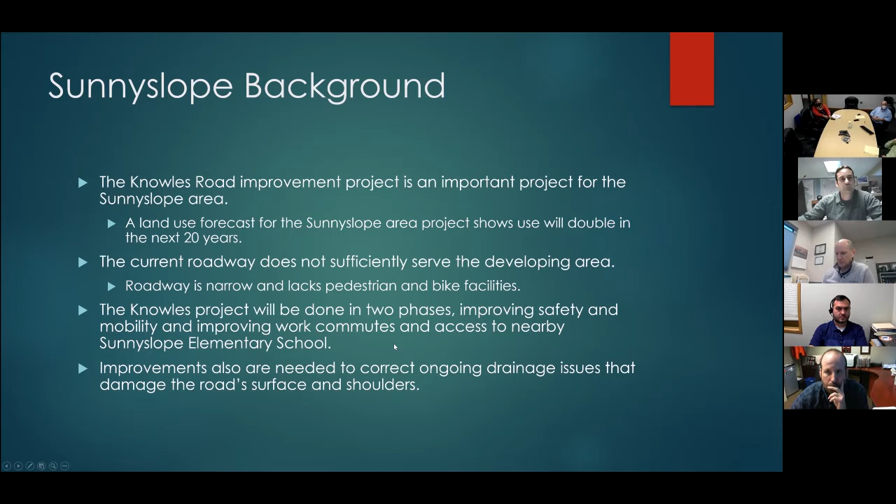So just a brief overview from the construction standpoint. It was awarded almost $1.4 million in grant funding from the Transportation Improvement Board Urban Arterial Program, and it's also supplemented with some local county funds and stormwater funds.

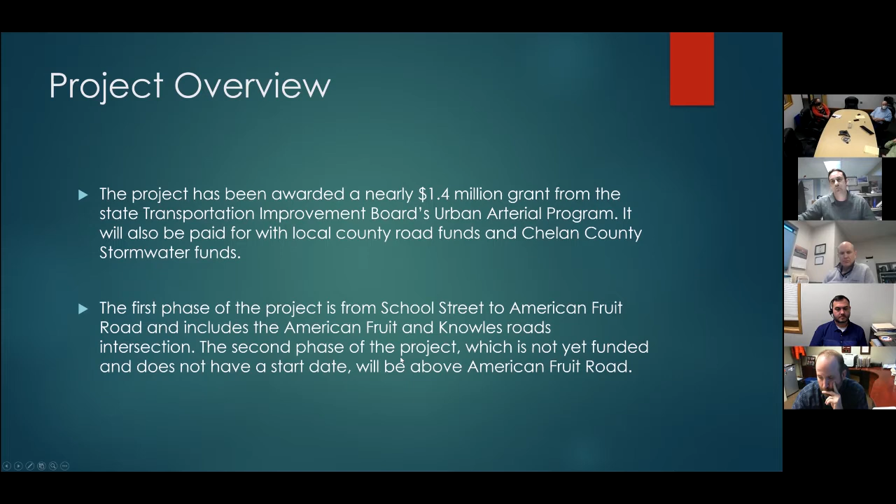The first phase will be from School Street, working up north on Knowles Road to American Fruit, and it includes some intersection improvements. The second phase, which is not funded currently, would take off from that ending point at American Fruit and go further north.

There's kind of an aerial overview of the existing facility right now. The dashed blue line are existing sidewalks, and Knowles Road runs north-south.

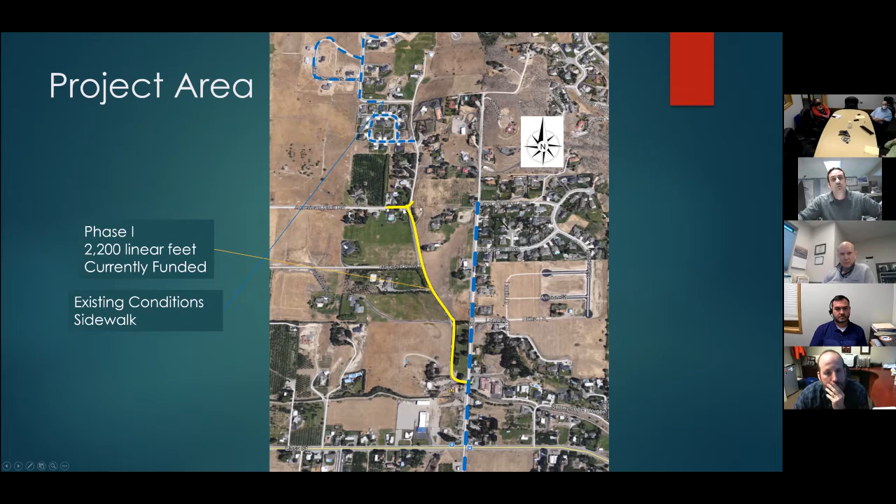So on this phase 1 project, there's about 2,200 feet, from School Street to American Fruit. The next phase will continue up and tie into that hairpin turn up by Sunnyslope Meadows, just past Lily Lane.

For the sidewalk facilities, shown in light blue, it would be constructed on the west side of the road. Once this project's done, in conjunction with the second one, we'll have connectivity all the way down to Sunnyslope School.

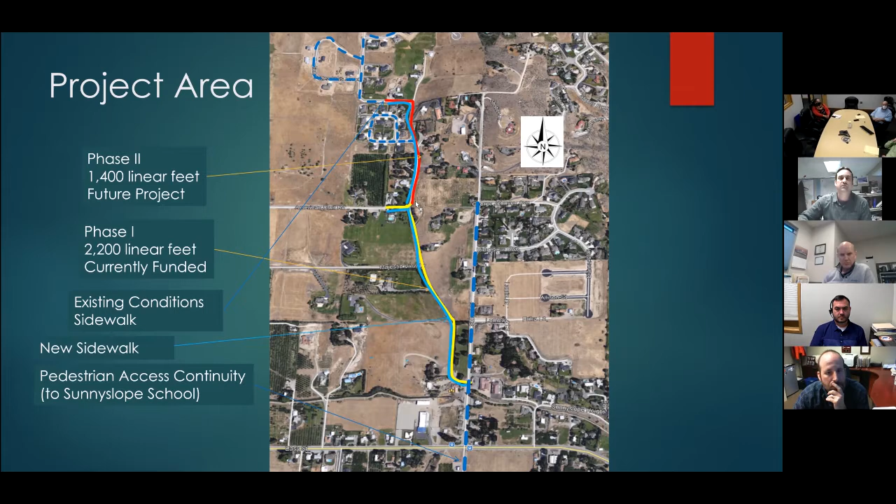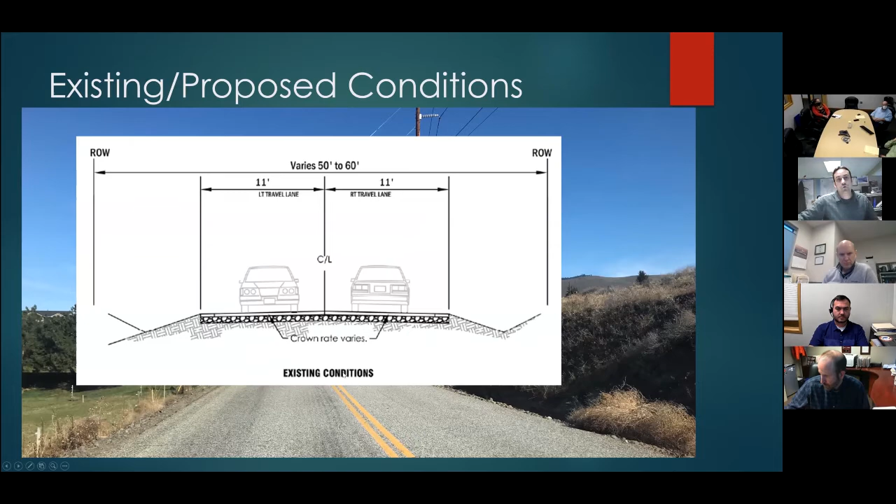Some key design components, starting with the pedestrian and road widening. Most of you are familiar with the roadway's existing conditions. There's definitely some design challenges here with the topography, utilities, and it's a narrow roadway. We've got basically 2 11-foot lanes.

The proposal will be 11-foot lanes, 5-foot shoulders, and those shoulders will be multi-use for safety and for bike access. The sidewalk would be constructed on the west side. Some portions require gabions, and we'll add the infrastructure for all the stormwater to catch the runoff on the road.

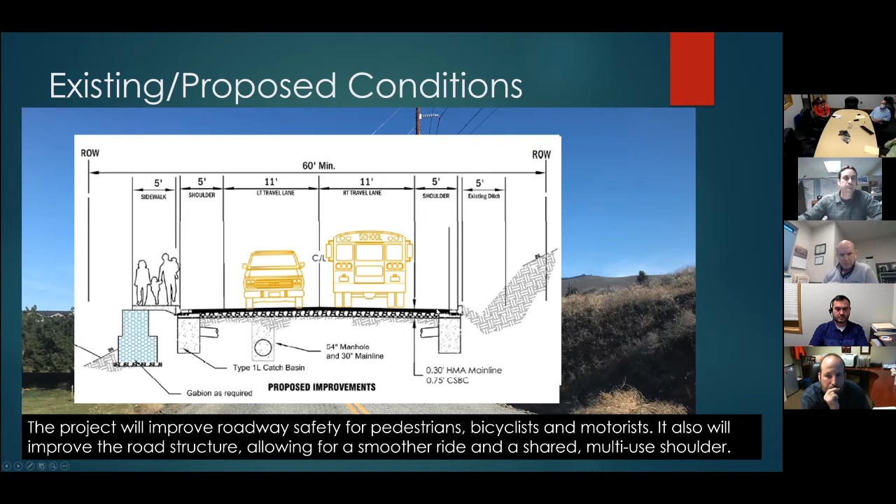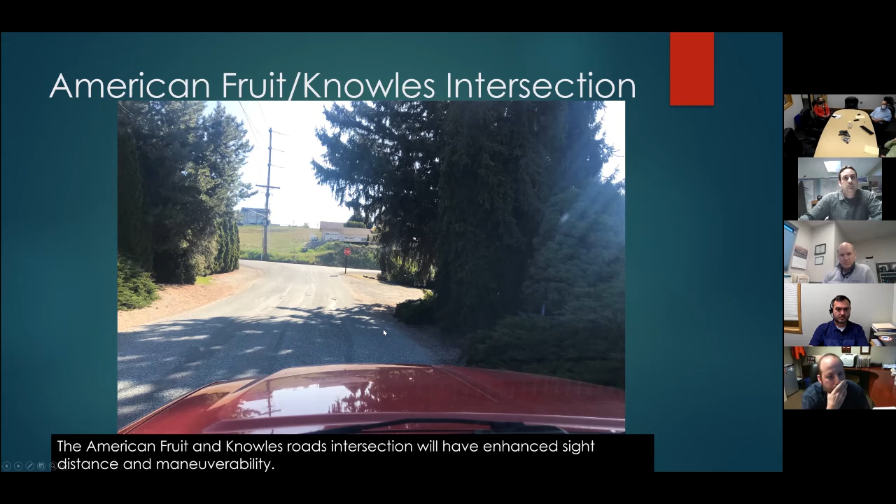Also included will be the intersection improvements. This is American Fruit Road looking eastbound, you can see the existing grade profile here. This is stopped at the stop sign looking north and southbound. You can see some of the intersection sight distance deficiencies here.

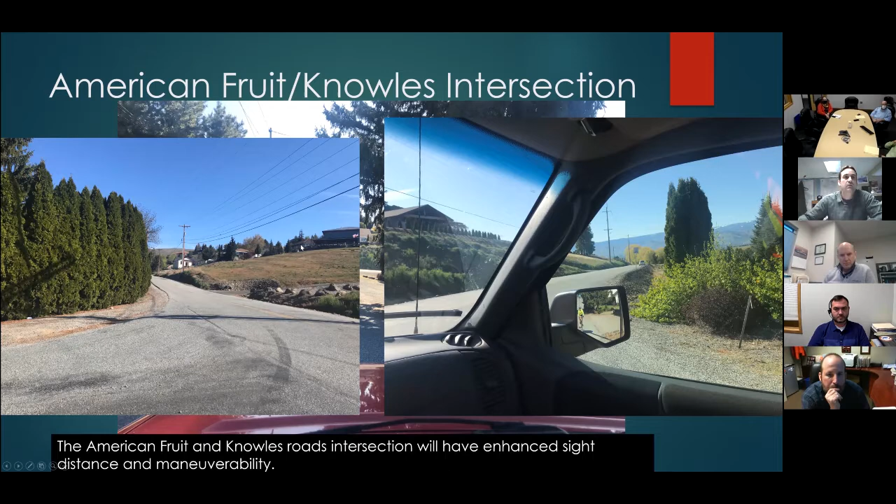This is kind of an overview. The top picture here is a plan view showing the existing road, and the darker gray shows where we're widening. This darker gray here shows where the sidewalk would be, and below that is the profile of the roadway.

American Fruit would probably be raised almost 3 feet, and that would bring that intersection elevation higher for better sight distance. The widening of the radius would improve mobility for larger vehicles.

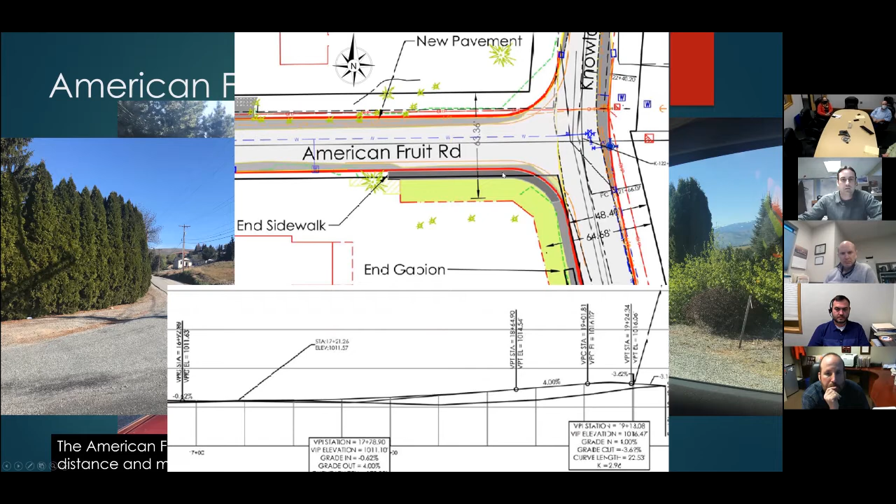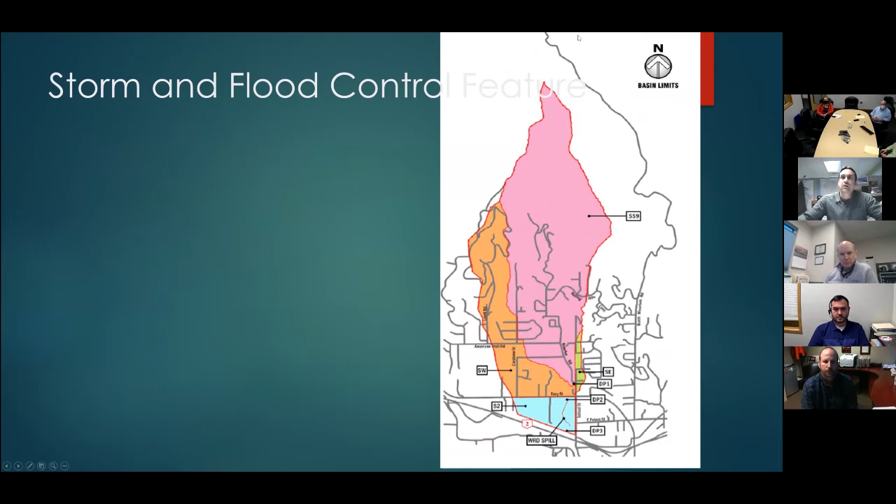I mentioned the stormwater conveyance. This is an overview of the existing basin, that's almost 800 acres. This is zoomed in more project specific, but this dark blue line delineates the natural drainageway.

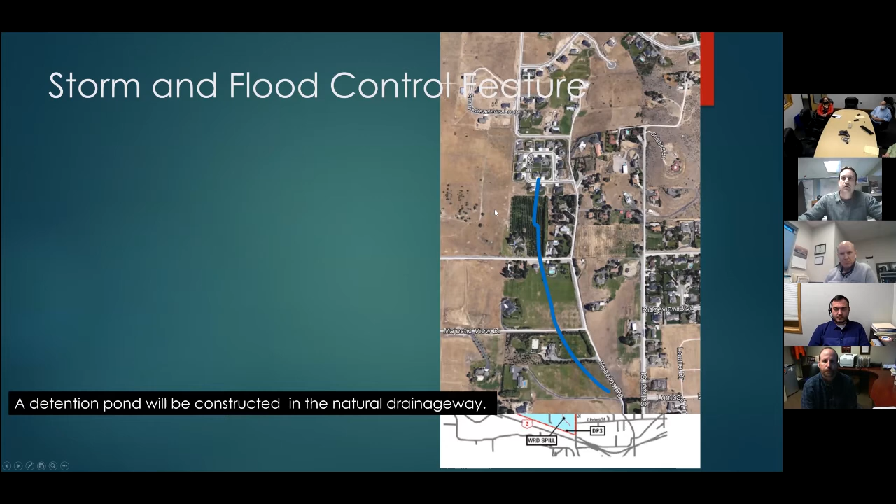With the project at the south side, we're looking at constructing a detention pond. This pond would treat all the road runoff, and it also fits the topography for the area. The pond was sized to address not only the roadway design, but also a global view of that flood zone area, and it's all sized accordingly.

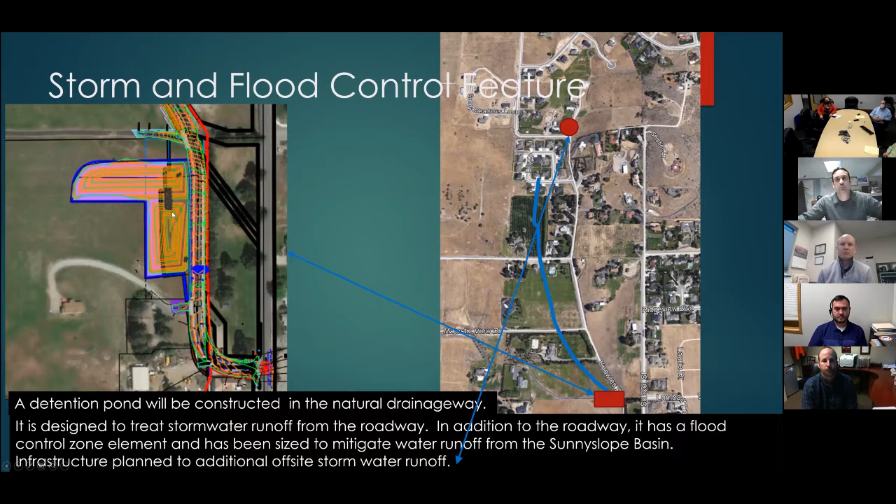Just rough dimensions of the pond, it's about 12 feet deep, and it's sized for, like I said, the 800-acre basin.

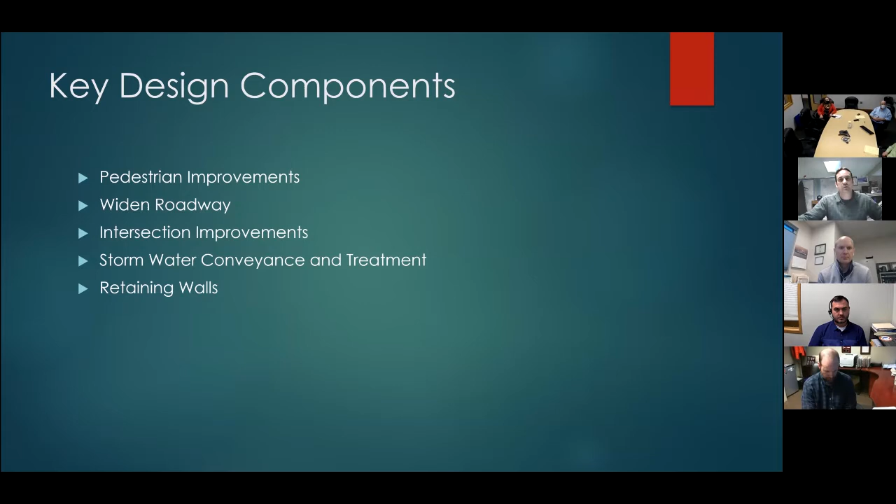And we'd have our sidewalk facility constructed on top of that with pedestrian railing.

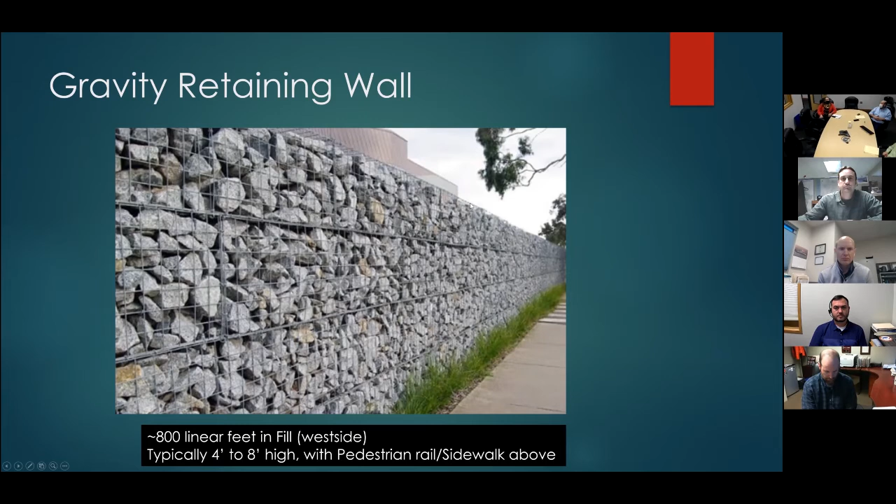So where we're at with the project now is we're about 75% through the design, to understand what the area is we're working in and what the corridor for the roadway is going to look like. We're looking to go out to advertisement for bid this winter, with construction that would follow in the spring or summer of 2022.

With the construction, it should take about 10 weeks from start to finish. Before we get to that point, you guys might see some utilities being relocated and some preliminary work being done. I think there's 2 or 3 transmission poles that need to be relocated.

During construction, it'll be mostly a 1-lane road with flaggers, our typical traffic control scenario. We're also considering a detour for some of the larger impacts, like trench work when we start digging the road up. Some benefits of a detour would be speeding up the work, which results in minimized impact to the traveling public.

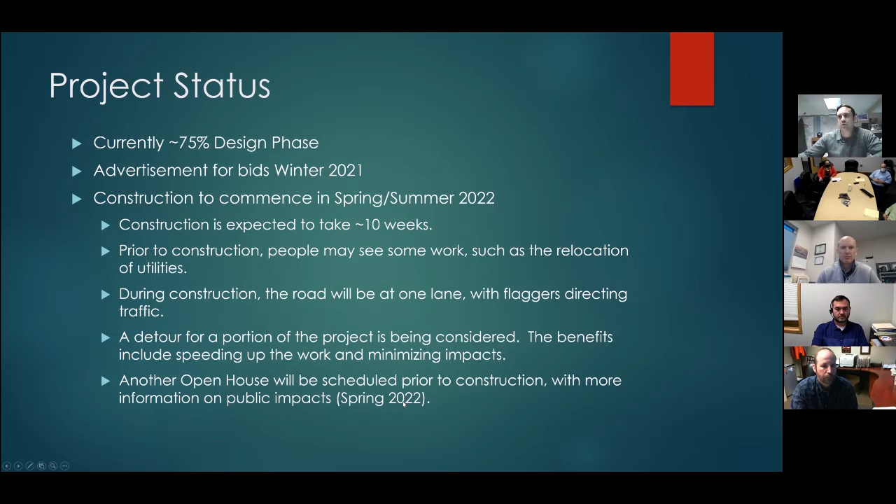As we get further into the design and identify those impacts, we can have another open house and discuss those in more detail. We tentatively have something scheduled for the spring of 2022, and at that time we should know the contractor's schedule and can address those impacts more specifically to the project.

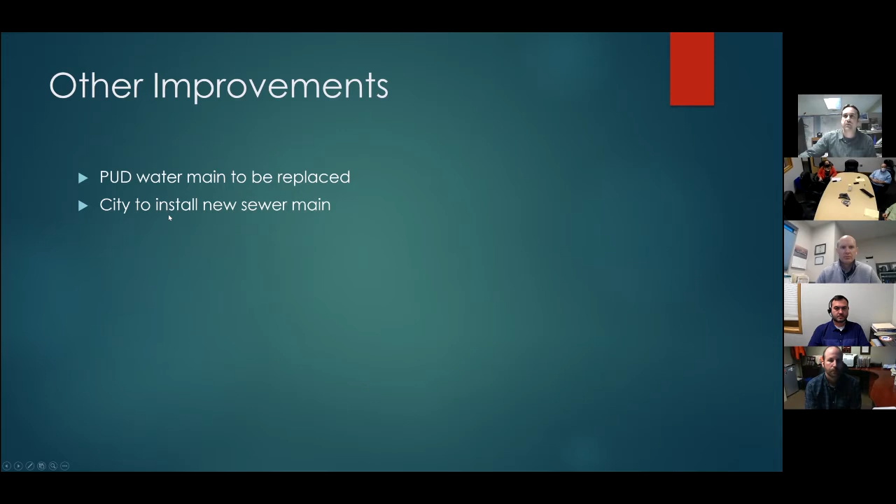A couple other improvements we're going to be doing in conjunction with the project: the PUD water main is getting replaced, and the city's looking at installing a new sewer main. I'm going to hand that off and unmute Courtney for this portion, and then we'll go into the city's sewer and have Jeremy explain those improvements.

Thanks, Lawrence. My name is Courtney Hill, and I'm a project manager at Chelan PUD, and I'm here to discuss the water line portion of the project.

We have approximately 1,400 feet of existing 4-inch steel water main that we're planning to replace with approximately 2,200 feet of new 8-inch ductile iron main. The timing of this project is really well suited, since the existing steel water main is at the end of its useful life. The new 8-inch main will increase capacity and reliability of the water system in the area.

Along with the water main, we'll be installing 4 new fire hydrants and replacing some of the existing customer connections.

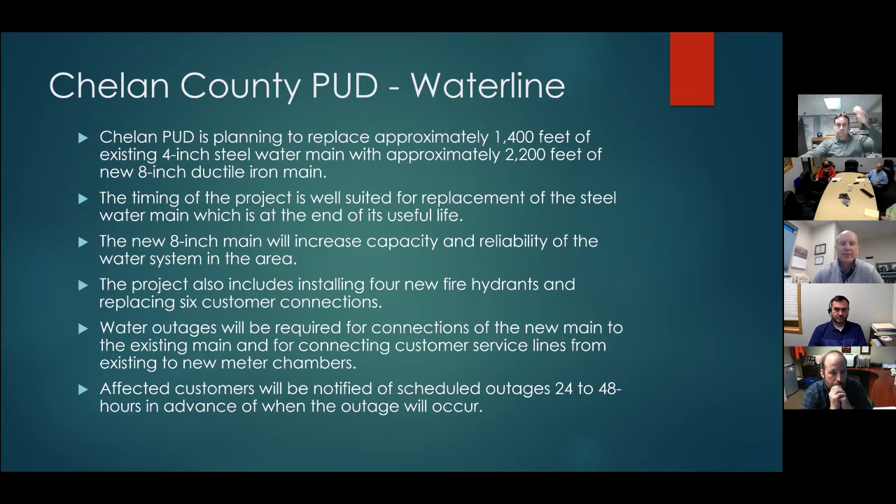The project will require some water outages when we connect into the existing water infrastructure at both ends of the project, and we'll also have some customer outages on individual services. We'll be notifying affected customers in the area 24 to 48 hours in advance, so there should be plenty of notice.

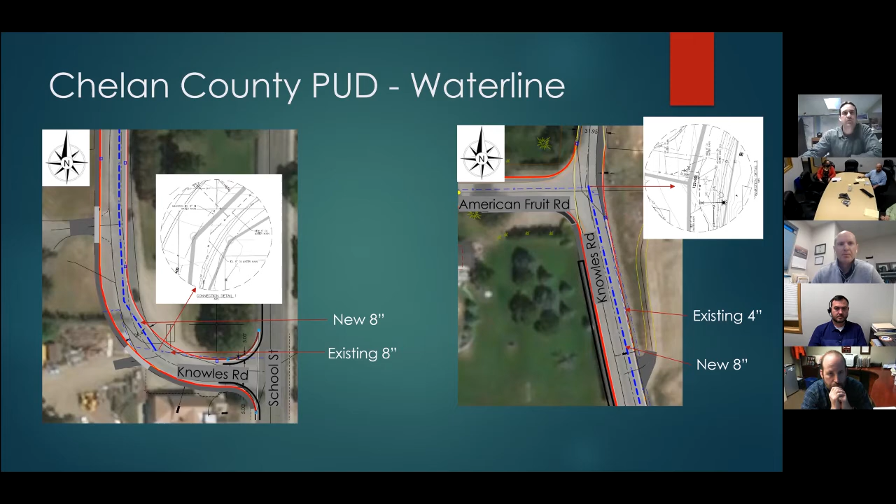Transitioning over to the city's portion. My name is Jeremy Hoover, and I'm the senior utility engineer with the city. I'm here with Jessica Shaw, our deputy public works director, and Ashish Leva, the design engineer on the project.

The city's scope on this is to install a new 10-inch main in Knowles Road. We'll be roughly 10 to 20 feet deep, depending on the location. We're planning on providing service to any existing developed properties that want to connect, and we'll leave them stubs they can utilize if and when they want to get off their septic system and leach field.

We'll also make this available to existing platted properties that haven't developed, so they don't have to install a leach field. The idea from our standpoint is to drain the entire area identified in the city's sewer comprehensive plan, to the north and west of Knowles Road, via this corridor.

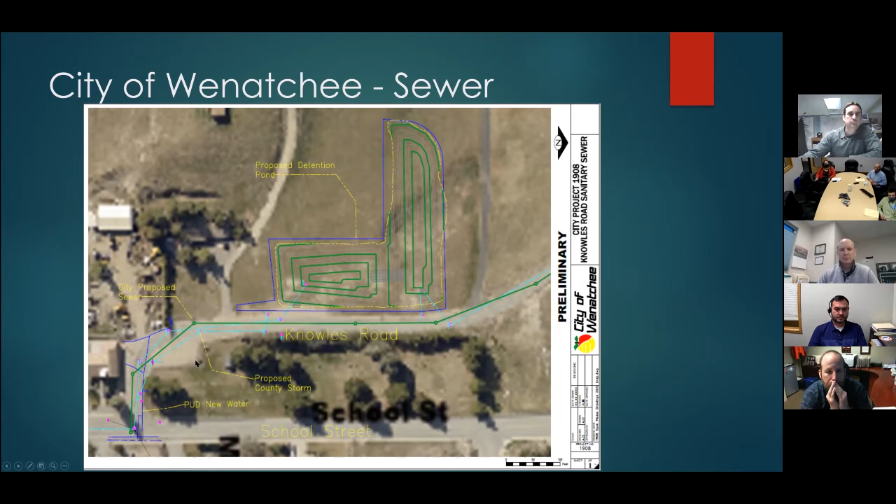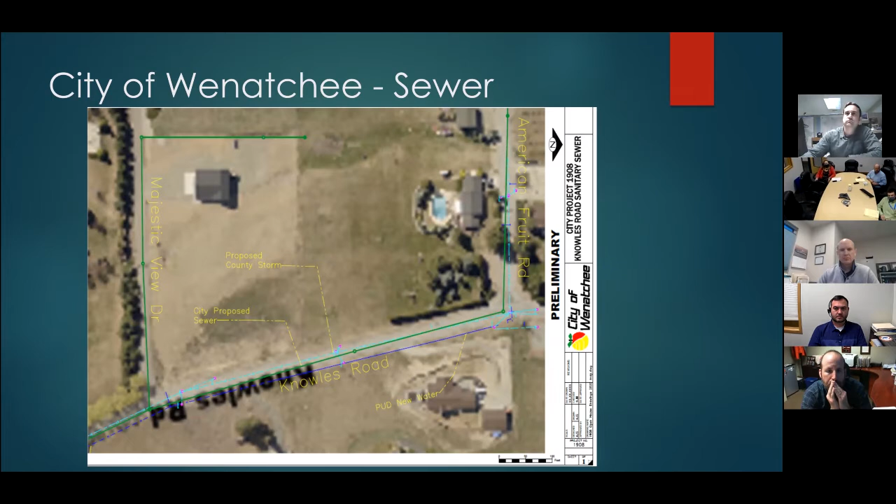The sewer main is being put in with the county project so we can do this with as little disruption to the traveling public as possible. The scope of the project the county is involved in is only Knowles Road itself. The city does need to put in some additional pipe further south, in School Street from Knowles Road south to Easy, in order to make the system complete and actually drain properly.

We are going to leave connections. There's a subdivision planned for the southwest corner of Knowles Road and American Fruit. We're planning on allowing them to connect to this sewer system through one of two possible scenarios: either a direct connection to Knowles Road, or a pipe that comes down through Majestic View. That's currently an alternative we're pursuing.

Majestic View is a private driveway or private roadway, so we need to get permission from the owners and want to look into that a bit more in depth. That may or may not be the most feasible alternative—if not, it will be deferred until some point in the future. But construction of the Knowles Road sewer is definitely going to be included with this project.

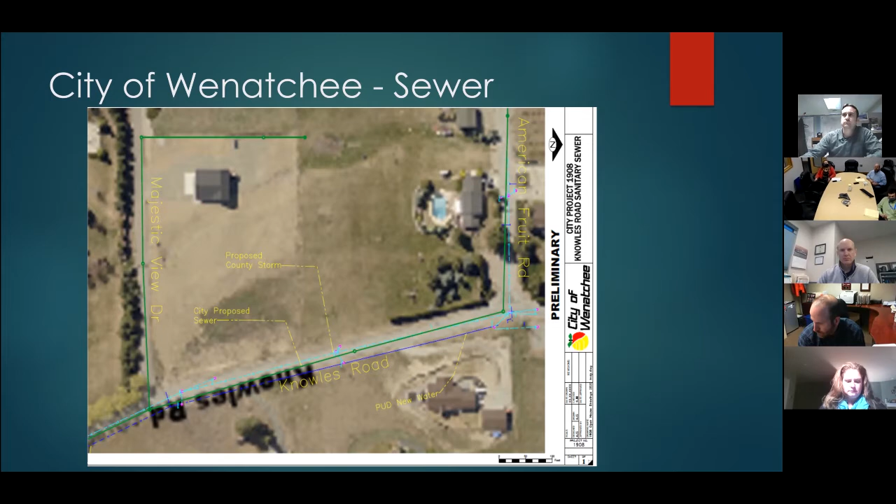There are connection fees associated with hooking up to the city sewer. There are several components to the fees, and they also depend on when you're planning on hooking up. Connection to the city sewer system is not mandatory.

The requirement for abandoning septic systems and leach fields is determined by the health district, and you are allowed via the RCW to maintain and repair your septic system and leach field to the extent necessary. Redevelopment of a property does change things if you are going to subdivide or add a new house or something of that nature. The city is not involved in the determination of whether or not you may install a leach field or repair the existing one.

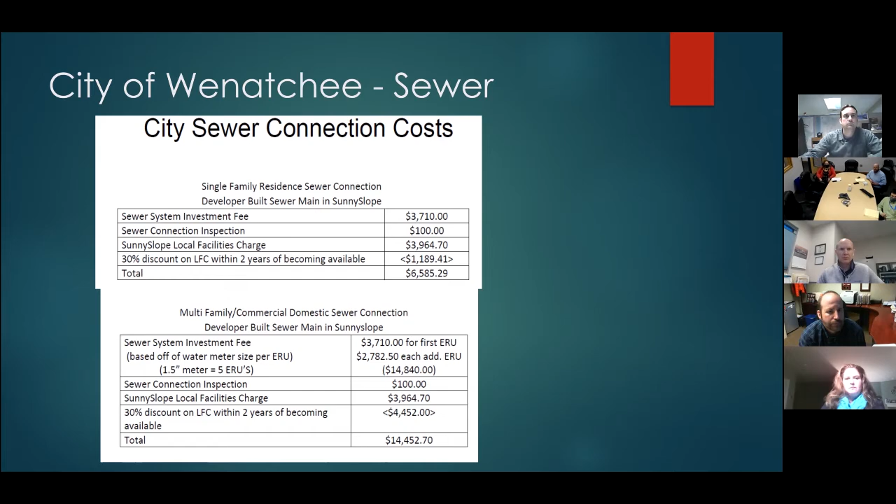That's done through the health district. But if you do decide to hook up to the city sewer system, there is a fee structure in place depending on whether you're a single family residence, multifamily, or various other scenarios as to when you connect. It's based on your water meter size. There's a host of parameters we can discuss with anyone specifically interested, but a very basic table is provided here. It's a little difficult to navigate if you don't know what you're looking at, but there are incentives to hook up at an earlier date.

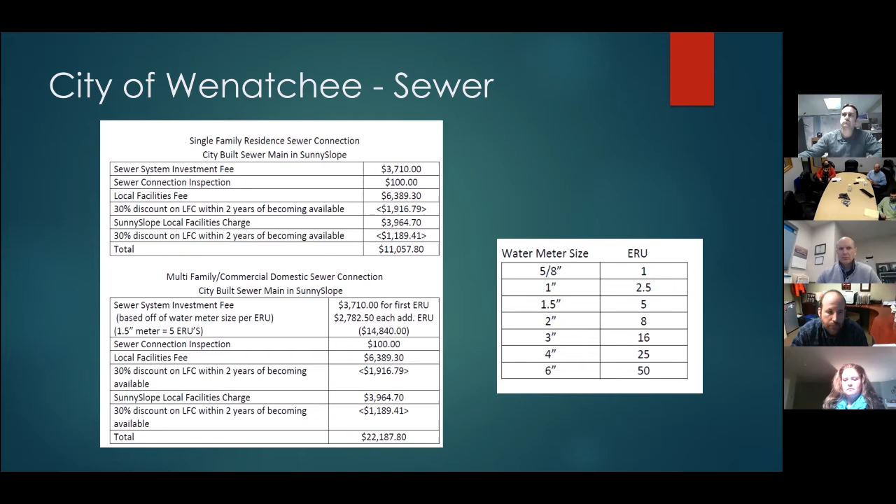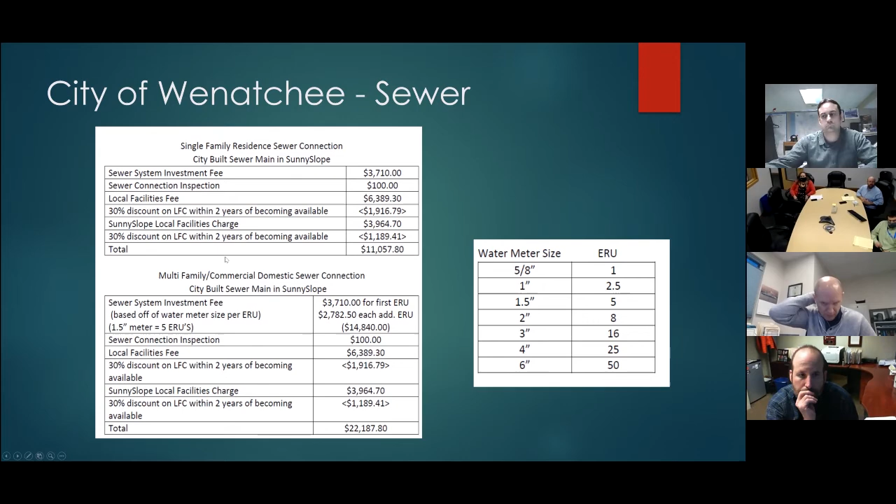If you are connecting to the system within 2 years of it becoming available, we give you a 30% discount on some of the charges associated with connection. And if you are interested in doing so, anyone here at the city can answer your questions, or at least get you to the correct person to answer your questions about those requirements and costs.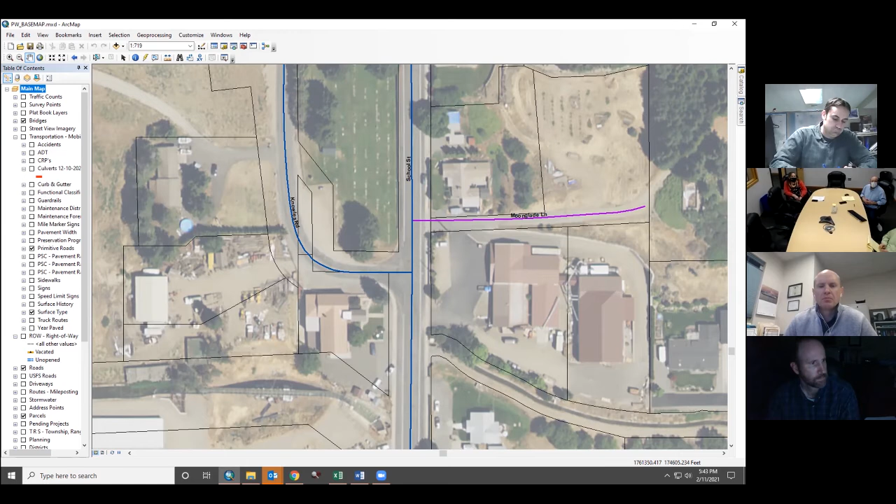Caden? Hi, yeah, this is Caden Stockwell. I live on 3795 Knowles Road, just a little bit above American Fruit Road. I just wanted to ask about the snow removal and who's responsible for doing that during the wintertime with the sidewalks. Is that the property owner or?

At this time, it's not actually codified that it's a requirement of the property owner. Are you on the east or west side? I'm on the east side.

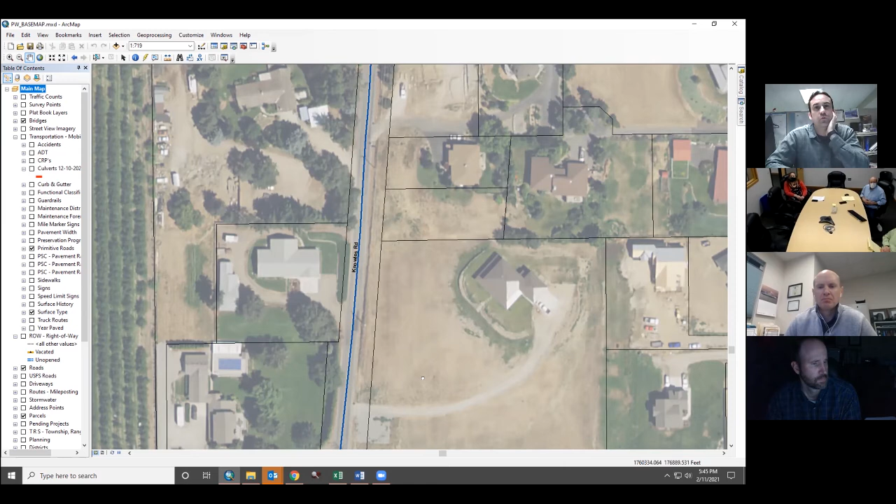Okay, that project will be later on in phase 2, but I was just curious about the snow removal. At this point, the sidewalk's planned for the west side of the road, and the existing alignment's going to have to tie into the new proposed alignment. So it's kind of all preliminarily built out, but like I said, it's not funded yet, so we're not pursuing it with the full design yet. Okay, thank you.

Are there any more questions? At least just on Knowles Road. Okay, so did I cut someone off?

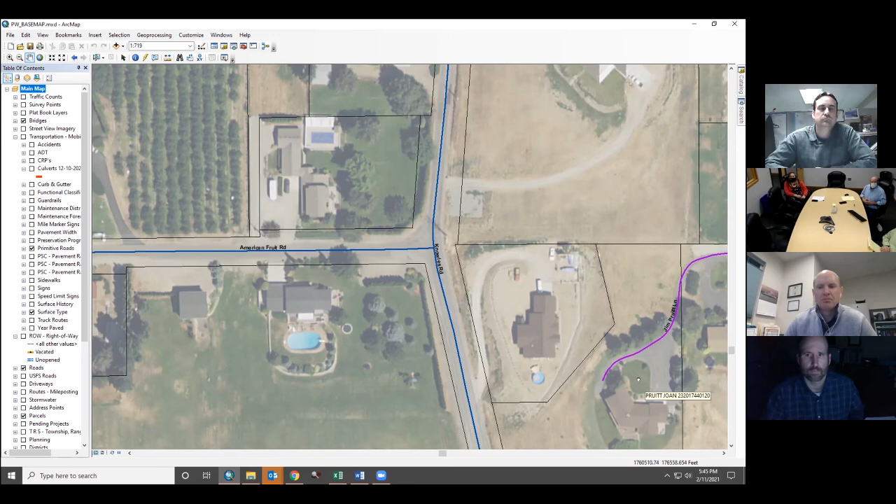So Rob, as far as the traffic impact study, how it comes over Knowles Road, coming over American Fruit, what you're doing with the traffic impact study is looking at your baseline. It does not take into account anticipated redistribution of the network of where everyone else is going to drive, because what you're trying to do is mitigate any sort of impacts at the current intersection from the added flow of additional traffic. That's the reason why you don't redistribute all of that. So what it's going to be is a comparison on where your typical routes are. If someone already comes up and around, down Knowles and down School, it's already being captured as School Street traffic in the analysis.

Okay. And does the study you're working on compensate for the effects of COVID and the economy being shut down? I don't know how you do that, but...

That's the one thing we had to talk to him about — you have to actually take older data and grow it, because you can't use last year based off the COVID impacts, the school closures and everything else. Yeah, there's been such an explosion, and I contributed to it because we built 3 years ago. There's been such an explosion of new construction and houses, and that particular intersection seems to be the primary focus of a lot of the development going on, either coming down Easy Street toward Wenatchee, or coming from the Meadowbrook development or other developments up Knowles.

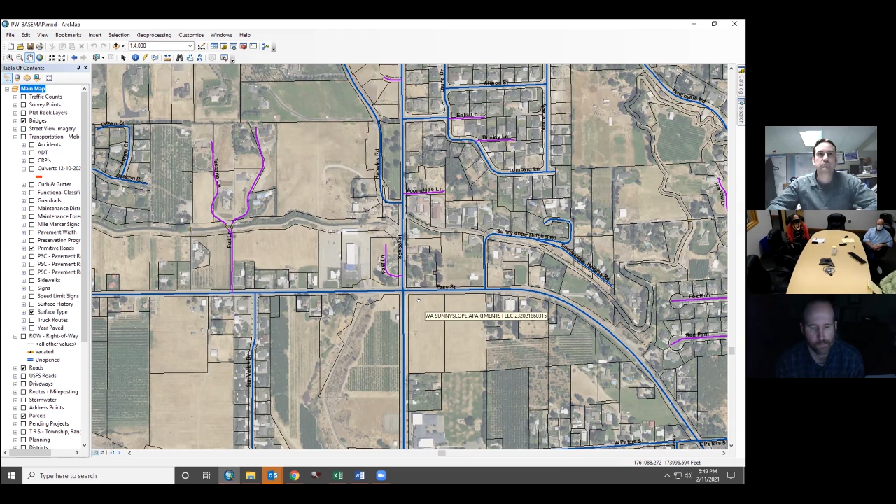Well, I appreciate the county having our back there, that'll be very helpful. I hope that communication is a little bit more forthcoming in the future. Maybe it will be, I hope so. I hope the city council or the county council will share with the community what the plans are and allow the community to comment, so we have an opportunity to make this a positive thing for everyone.

Anyway, thank you. Okay, let me talk. Appreciate it. Oh, no problem. Does anyone else have anything to say? As I'm sitting here in the dark because the automatic lights turned off on me.